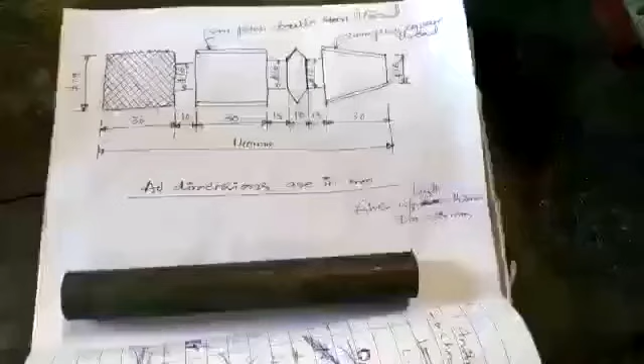Good afternoon everyone. In this lecture, I will show how to prepare a model on lathe using different operations from the given cylindrical workpiece. So this is the given diagram.

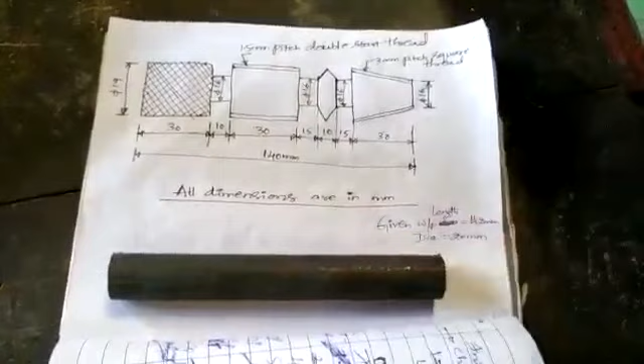This is the given workpiece. First you need to check the length of the workpiece and diameter of the workpiece. So here the length of the workpiece is 142 mm and the diameter of the workpiece is 20 mm.

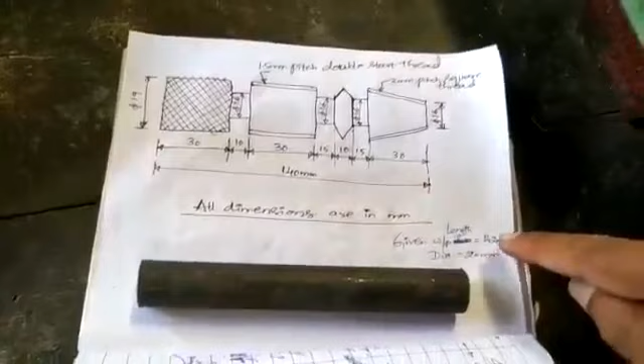So in this diagram you can observe the required diameter is 19 mm and the required overall length of the workpiece should be 140 mm. So you need to remove 2 mm in length and 1 mm in diameter.

So for that you have to do facing operation in order to reduce the length of the workpiece and cylindrical turning in order to reduce the diameter of the workpiece.

So tools required to complete this model. This is a single point cutting tool. This tool is used to do facing operation, cylindrical turning, diamond shape operation and taper turning. We can do all these operations with this single point cutting tool.

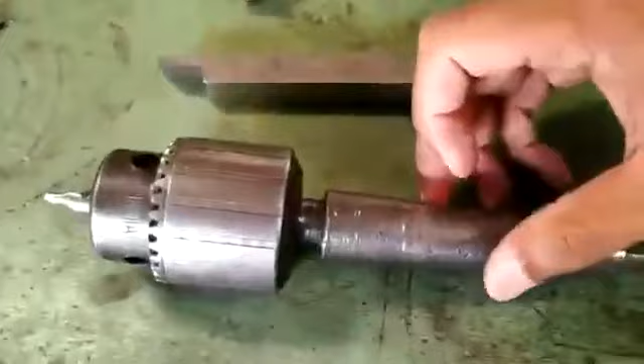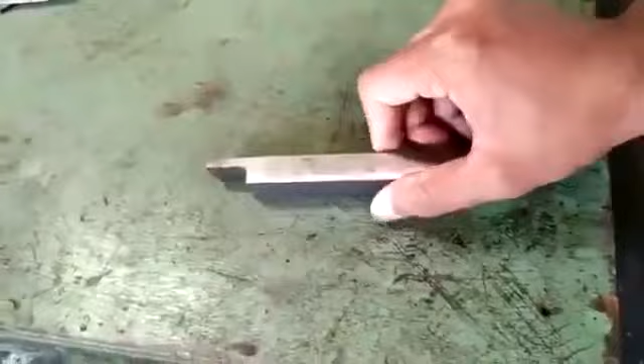So this is a center bit in order to produce a countersink hole. This is a parting tool for doing step turning operation. This is a diamond point knurling tool, a multi-point cutting tool.

So this is a single point thread cutting tool. The tool angle will be 60 degrees. So this is a square thread cutting tool. It is also a single point cutting tool.

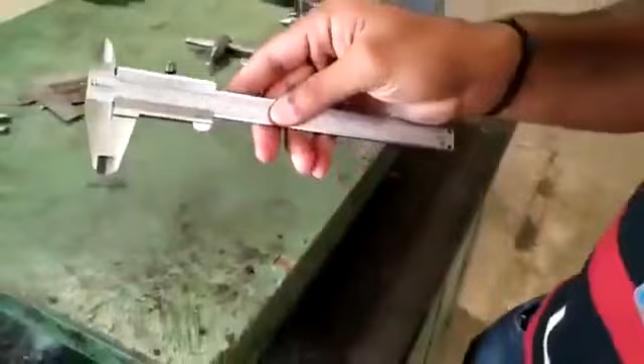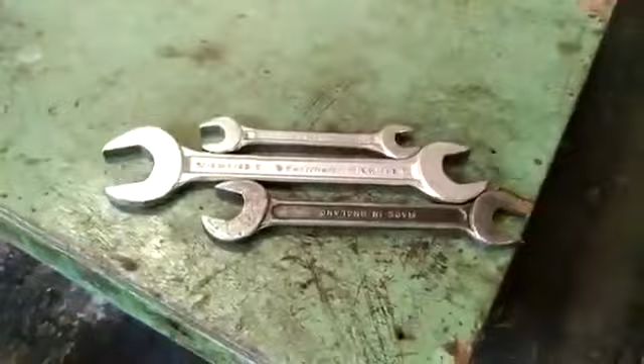In center, this is chuck key and this is tool post key, and this is vernier caliper in order to measure the length of the workpiece and diameter of the workpiece. So this is packing plates and these are all the spanners. So these are the tools required to complete the model.

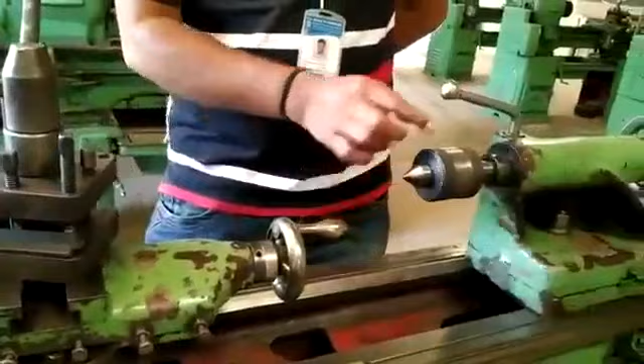First we have to fix the given workpiece in a 3-jaw chuck. Then we have to fix the revolving center in a tailstock. After fixing the revolving center, we need to place the single point cutting tool in a tool post by using a supporting plate, and this cutting tool tip should be exactly on the tailstock axis.

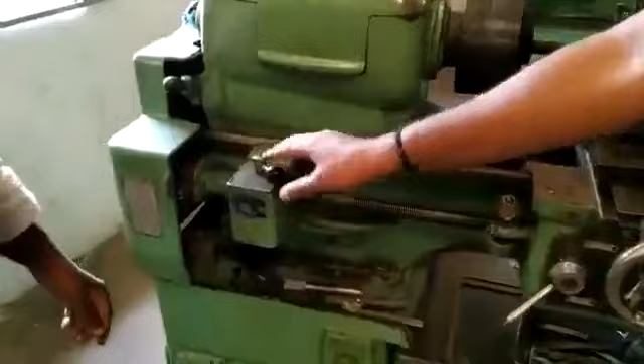So first you have to switch on the machine by pushing this knob into counterclockwise direction and make sure that the spindle rotates in a counterclockwise direction. Now we are doing the facing operation in order to reduce the length of the workpiece. Start.

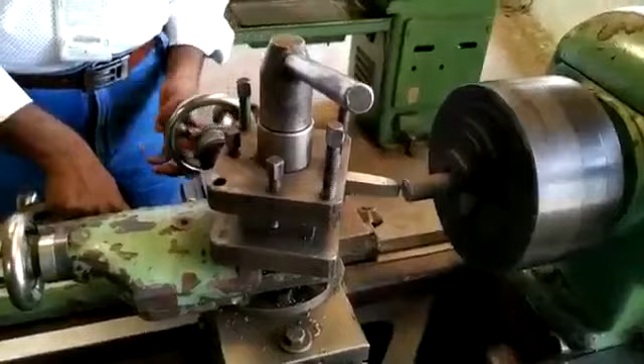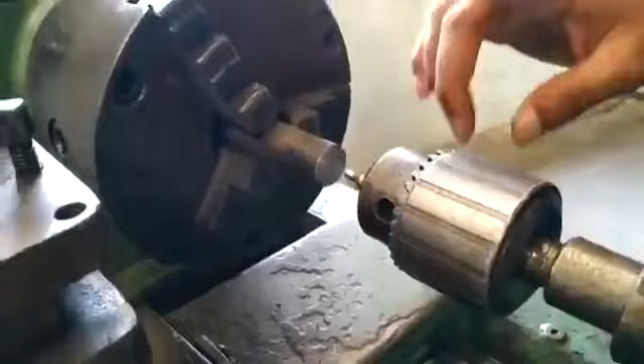So now we are doing the facing operation in order to reduce the length of the workpiece. Now we have completed the facing operation. This facing operation has to be made on both sides because if there are any burrs in the workpiece, they will be removed.

So after completing the facing operation the workpiece will reduce in length to 140 mm. So we are doing the countersink hole by fixing the countersink bit.

So after facing operation is completed, the next operation we are doing is cylindrical turning. Cylindrical turning has to be done here in order to reduce the workpiece diameter to 19 mm, because the given workpiece diameter is 20 mm.

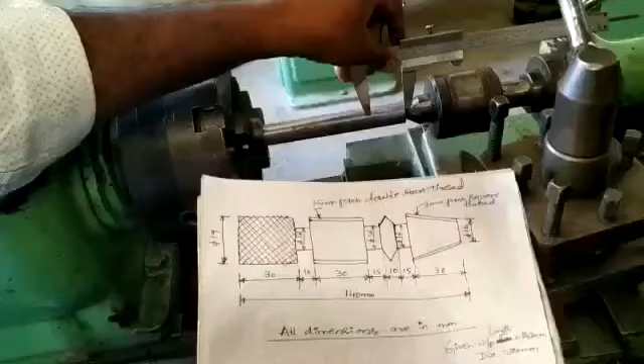So now we have completed the cylindrical turning and reduced the diameter from 20 mm to 19 mm. After the cylindrical turning is completed, the next step is to mark on the given workpiece.

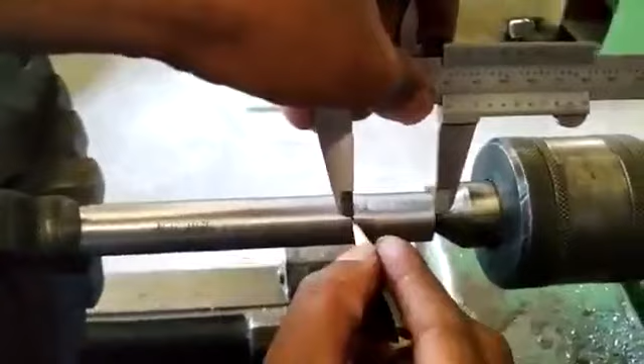So we have to mark either from the left end or from the right end. So now we have just marked 30 mm from the right hand side, right end. So next from that we are marking 15 mm.

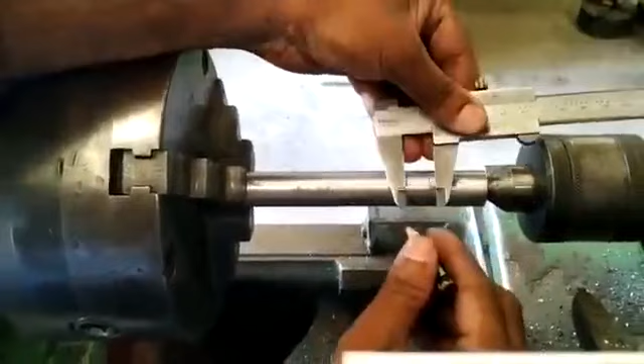Now the marking is completed. We have started from the right hand. We have marked 30 mm, next 15 mm, 10, next 15 mm, 30 mm, 10 mm and 30 mm. So now we are doing step turning for a length of 15 mm.

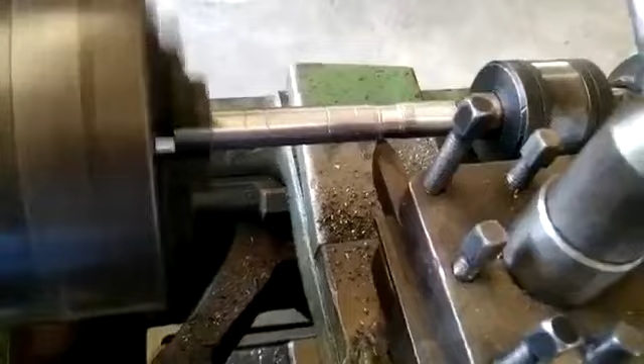And we have to reduce the diameter from 19 mm to 16 mm. So now we have fixed the parting tool, in order to make the 90 degree.

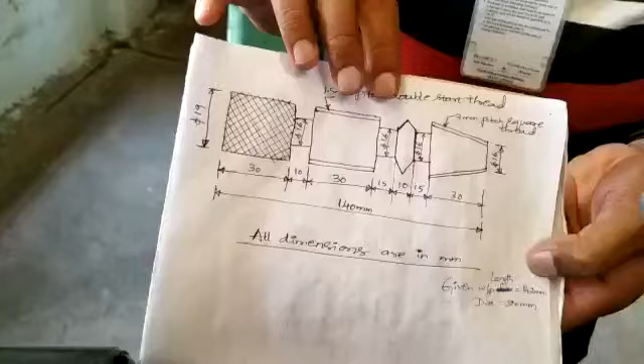Now we have completed with the step turning. So after step turning is completed, next we are doing the V shape for a length of 10 mm.

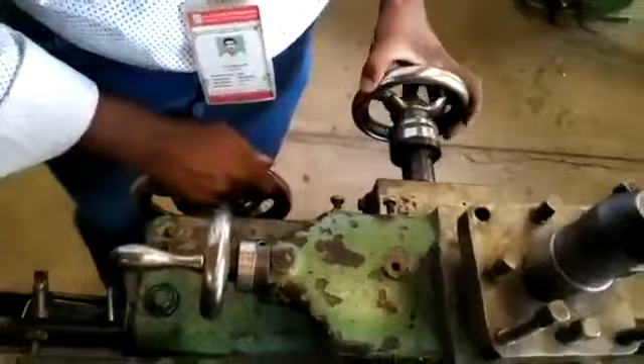We are making the V joint with the help of single point cutting tool. So now we have completed with the V shape.

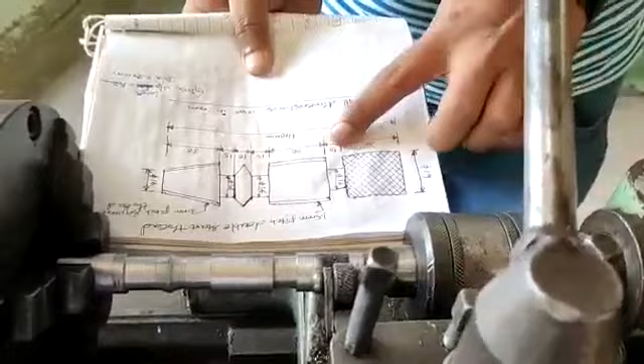Now I am doing a knurling operation for a length of 30 mm by fixing the diamond point cutting tool, knurling tool in a tool post and fixing the cylindrical workpiece in a chuck. So now you can see the knurling operation is completed for a length of 30 mm.

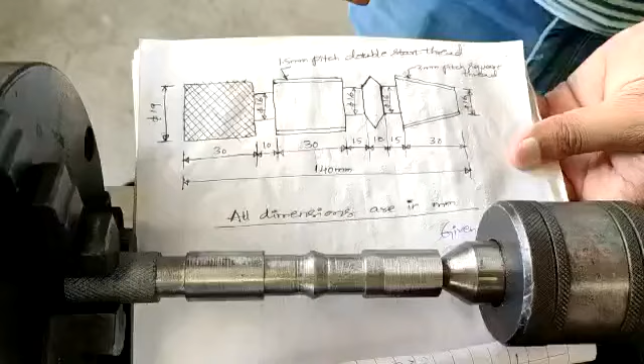So next operation I am doing is thread cutting for a length of 30 mm. So here in this diagram he has given 1.5 mm pitch double start thread. So for that we need to calculate the gear ratio.

So now I have to do thread cutting operation for a length of 30 mm. So in the diagram he has given 1.5 mm pitch double start thread. So he has given pitch in terms of millimeter, so we have to select the metric thread. If he has given the pitch in terms of threads per inch, then we have to select British Standard Whitworth, BSW thread system.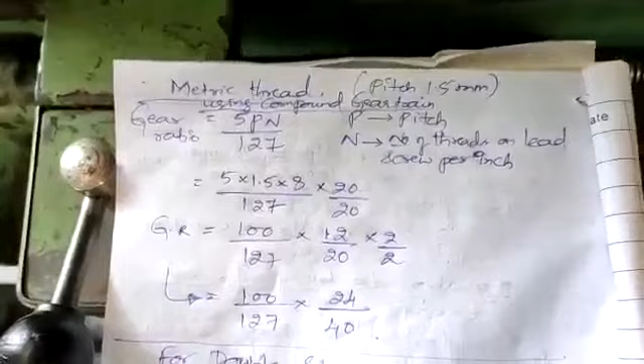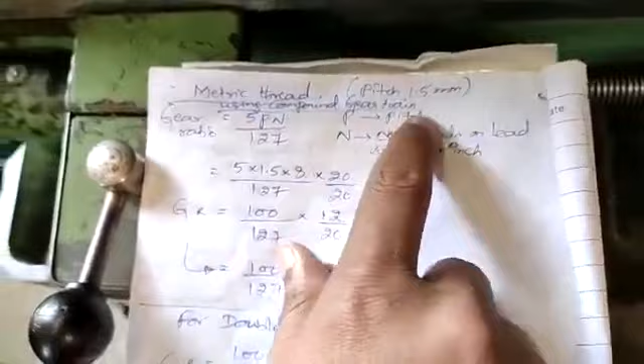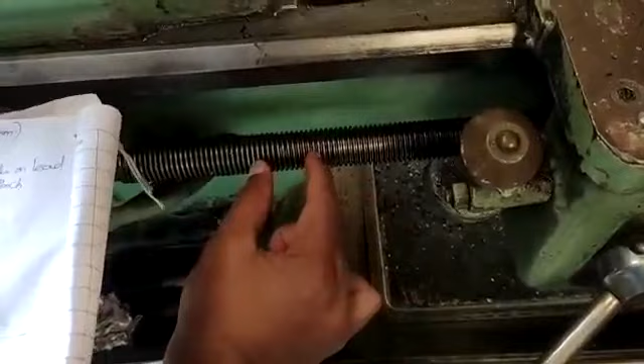For metric thread using compound gear train, in order to find out the gear ratio, we have a standard formula: 5PN divided by 127. So in this P is pitch they have given in the diagram, and N stands for number of threads on the lead screw per inch. So we need to measure the number of threads per inch. Here in this lead screw we have 8 number of threads per inch.

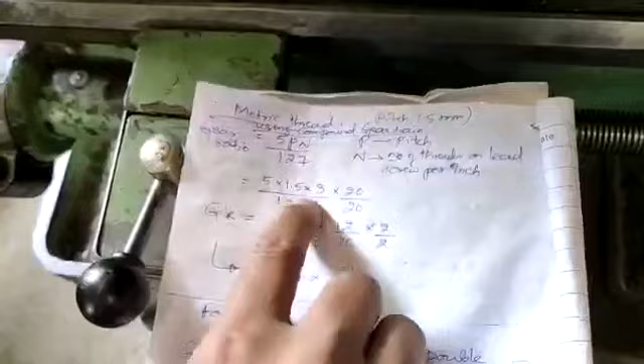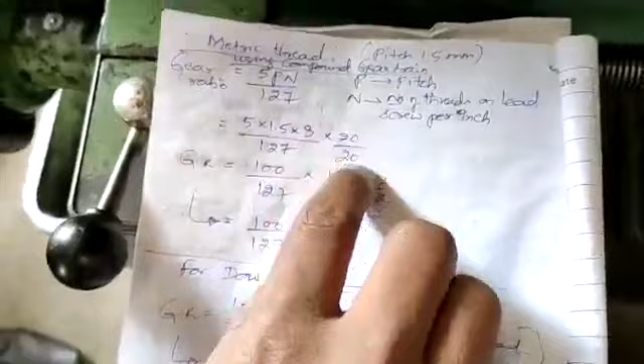So now we are substituting 5 into P, pitch he has given 1.5, into number of threads on lead screw per inch, it is 8, divided by 127. So to get 100 by 127, we need to multiply and divide by 20. So 5 into 20 is 100, divided by 127, into 1.5 into 8 is 12, divided by 20. And so we have...

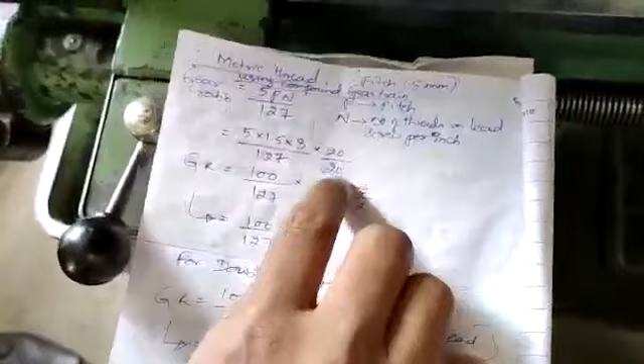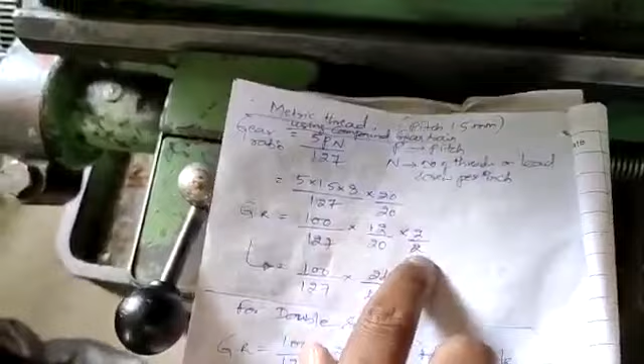So 12 by 20 - these smaller gears are not available in the shop, so we multiply and divide by 2. So now we obtained 100 by 127 into 12, to the 24 divided by 40.

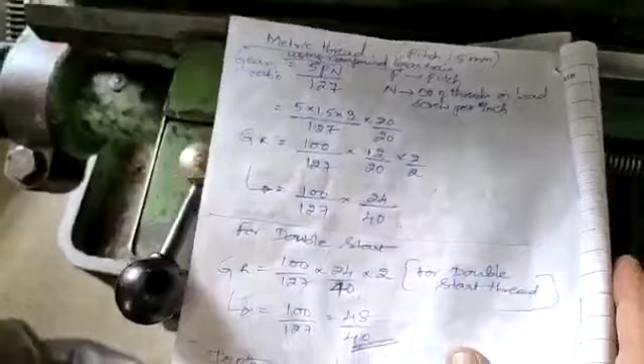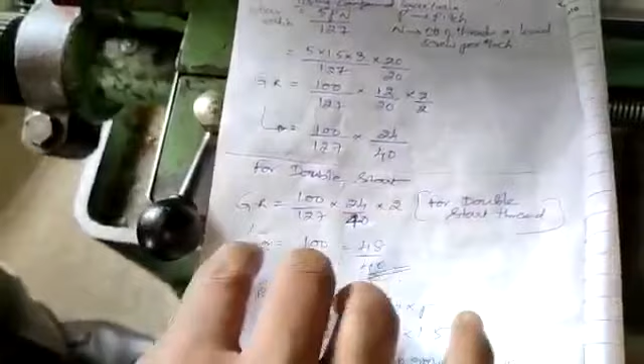So this gear ratio is for single start. In this diagram he has mentioned double start, so for that again we need to multiply it by 2 for this gear ratio. If it is triple start, we need to multiply it by 3. So now we can multiply 100 by 127 into 24 into 2, which is 48, divided by 40. So this is the gear ratio.

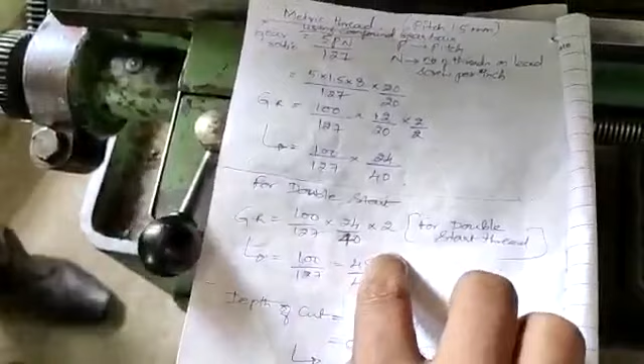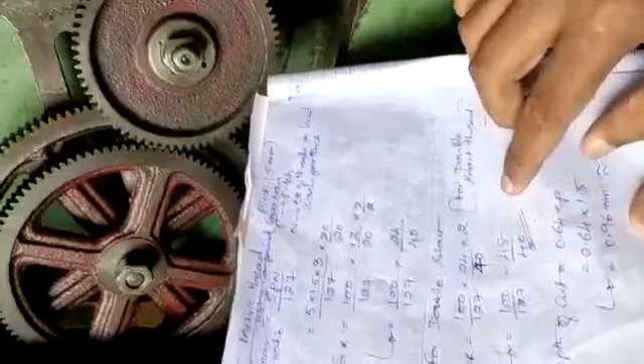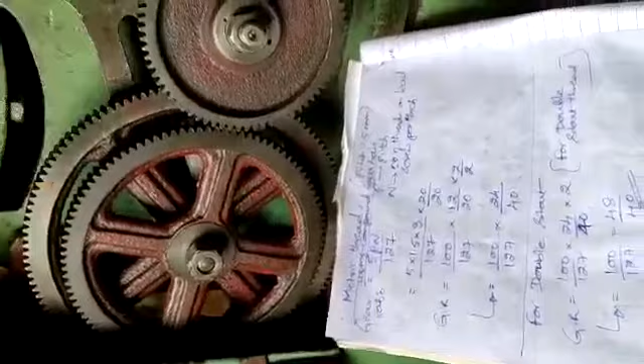So 48 is the number of teeth on the driver gear, and this is 40 number of teeth on the driven gear. So according to the gear ratio we have obtained, this is number of teeth on driver gear, and this is number of teeth on driven gear. So for this compound gear train, this is 100 number of teeth, this is 100 and this is 127. So now we have to fix here, this is the driven gear, of 40 teeth, and this is 48 teeth.

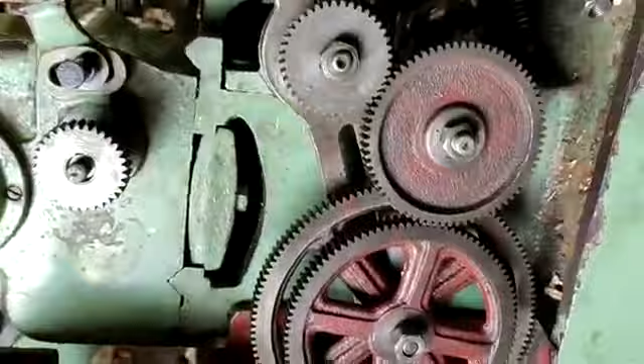So now we are changing this gear. So now we have changed the gears according to our calculation. So this is the driver gear, we have obtained in the calculation 48 teeth. So this is compound gear, 100 teeth, 127 teeth, and it is driven gear, it is of 40 teeth.

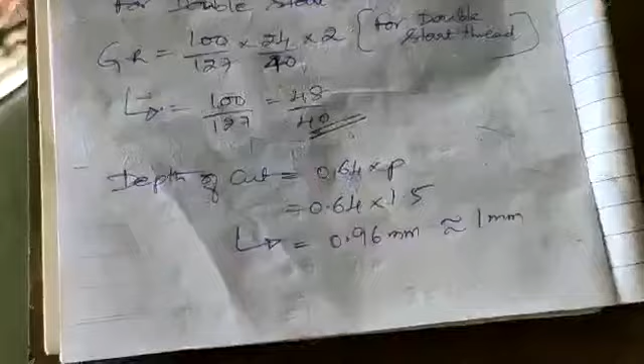We have a standard formula to find out the depth of cut: it is 0.64 times the pitch. The pitch he has given is 1.5 mm. So 0.64 into 1.5 is 0.96 mm, which is approximately 1 mm. So 1 mm is the depth of cut.

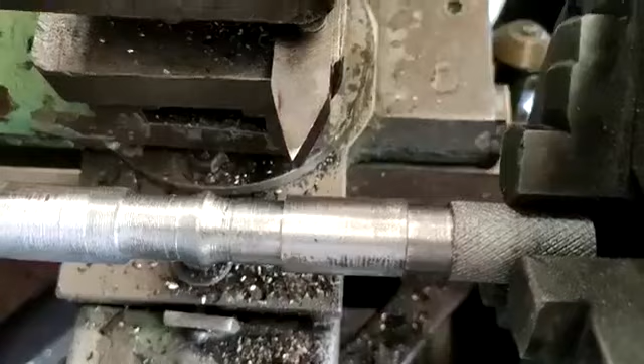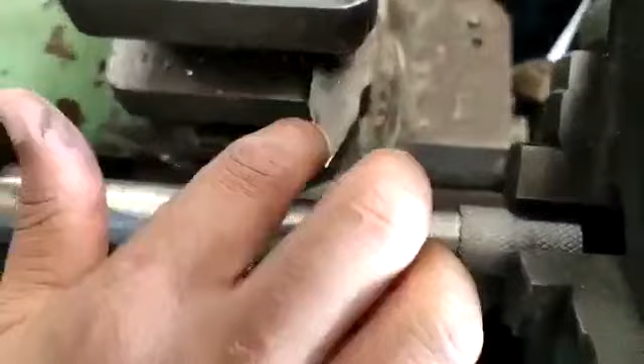So now I am doing threading operation for a length of 30 mm. For that we have to fix the thread cutting tool. The cutting tool angle should be 60 degree. So we have to fix the threading tool in a tool post, and we have to fix the workpiece.

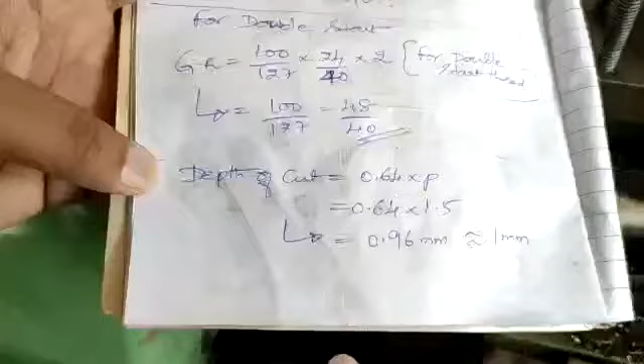According to our calculation, we have got the depth of cut of 1 mm, giving 0.1 mm for every pass. Now I have completed the single start thread by giving a total depth of cut of 1 mm.

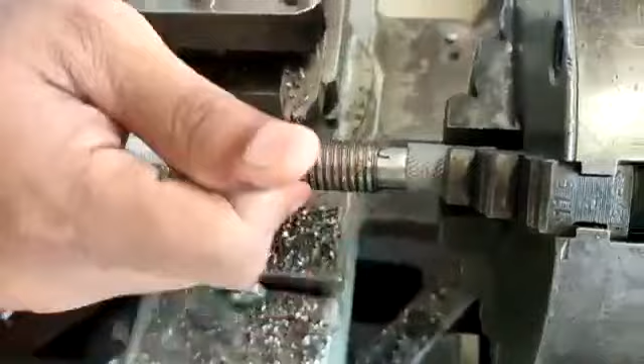To start double start thread, we need to make a few changes in the gear train. One of the teeth in the 48 teeth gear meshes with the compound gear of 127 teeth, so we have to mark here. This gear has 48 teeth, so we need to mark exactly half, that is 24 teeth. Counting from here 1, 2, 3, 4 and so on, this is the 24th tooth, so we need to mark here.

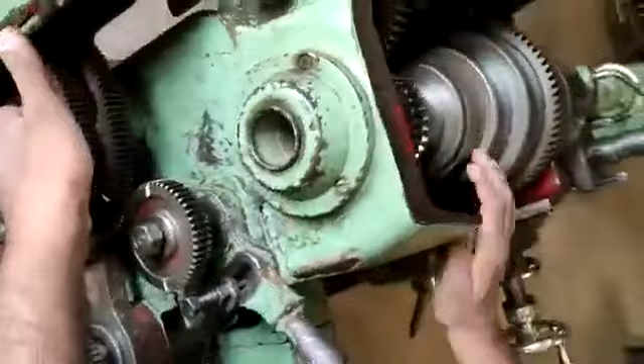By rotating the spindle, we have shifted the previous mark to here. One single start thread is over. Now I am doing the double start thread, giving a depth of cut of 1 mm, with 0.1 mm depth of cut for every pass, so we have to pass 10 times to complete. Now the double start thread is completed.

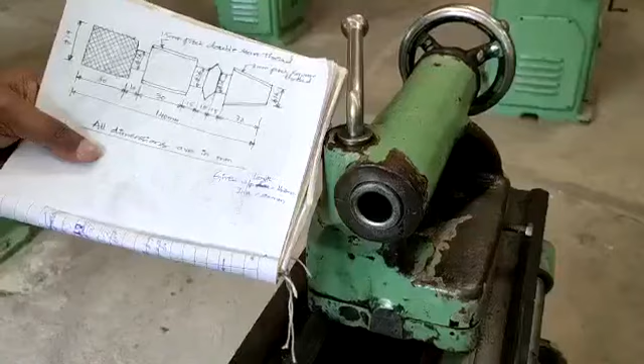Now I am doing taper turning operation for a length of 30 mm. For taper turning we have two methods: one is swiveling the compound rest method, and the second is offsetting the tailstock method. Here we are doing the second method, offsetting the tailstock method.

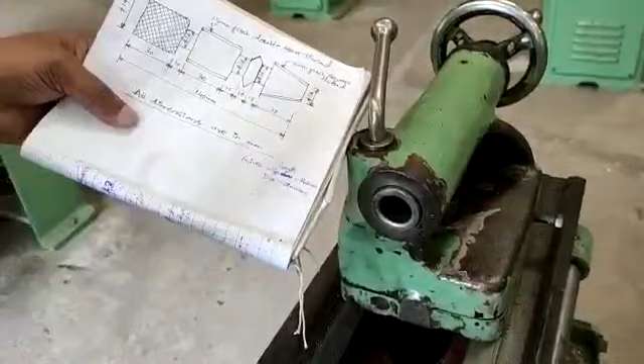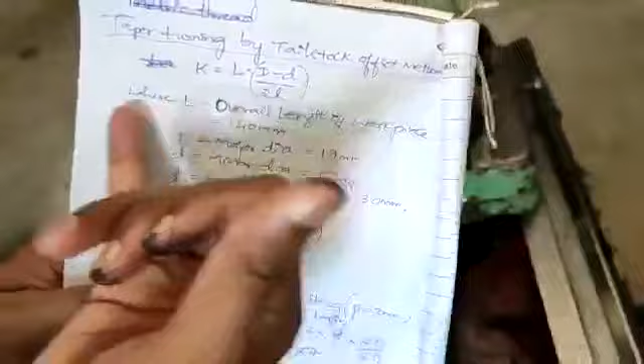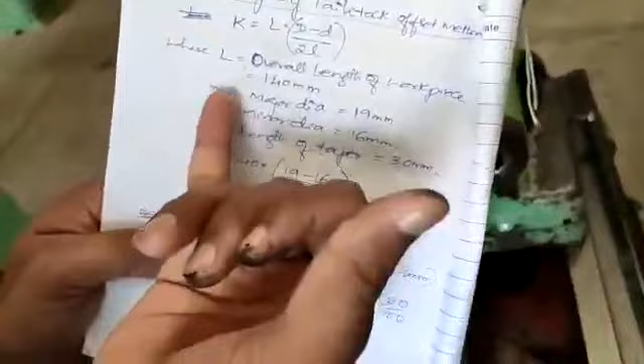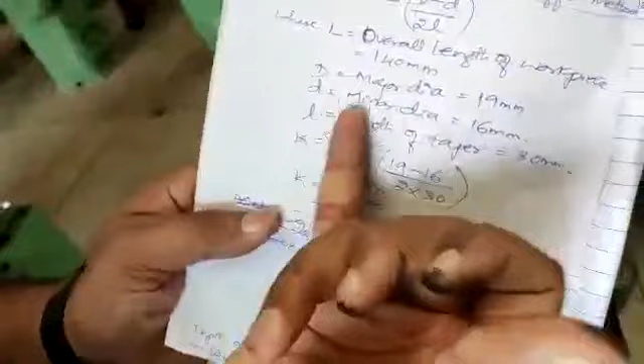So here we are doing the tailstock offset method. We have a standard formula: K equals L into (D minus d) divided by 2l. Where L is the overall length of the workpiece, which is 140 mm, D is the major diameter, which is 19 mm, and small d is the minor diameter, which is 16 mm. Small l is the length of the taper, which is 30 mm. By substituting all these values, we get the value of K equal to 7 mm.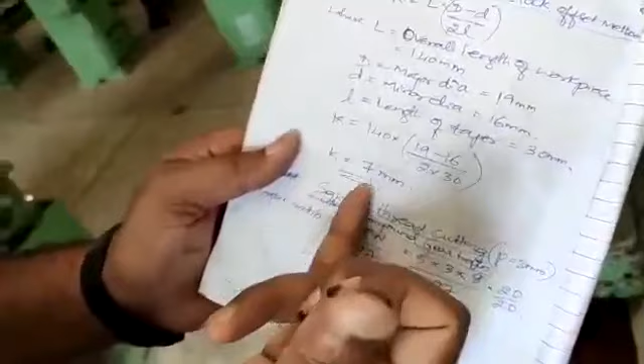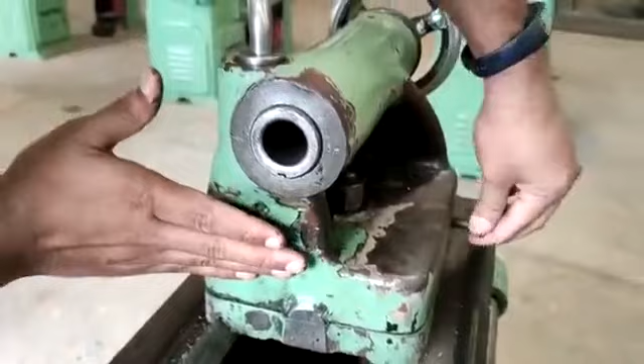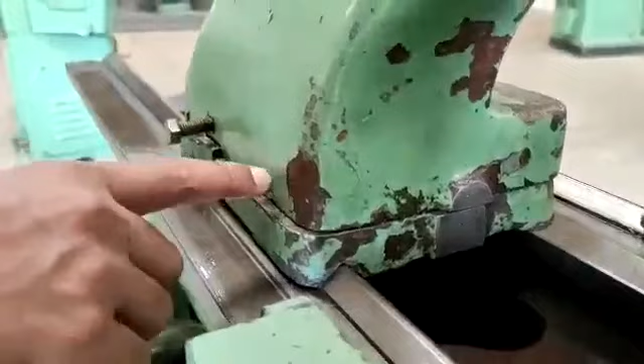Here you can observe the bottom portion of the tailstock exactly coincides with the top portion. According to calculation we have got K equal to 7 mm, so now we have to shift the top portion of the tailstock by loosening this screw, and slide it so that the zero coinciding mark aligns with the 7th division. Now you can observe we have shifted the top portion of the tailstock.

Now we are doing the taper turning operation by the tailstock offset method. You can observe one end of the diameter is getting reduced. This is the major diameter of the tapered portion, which is 19 mm, and this is the minor diameter, which is 16 mm.

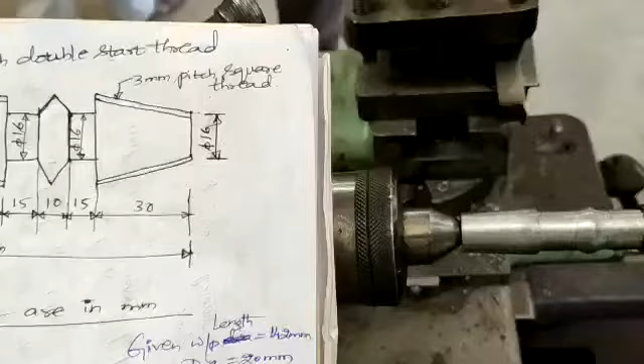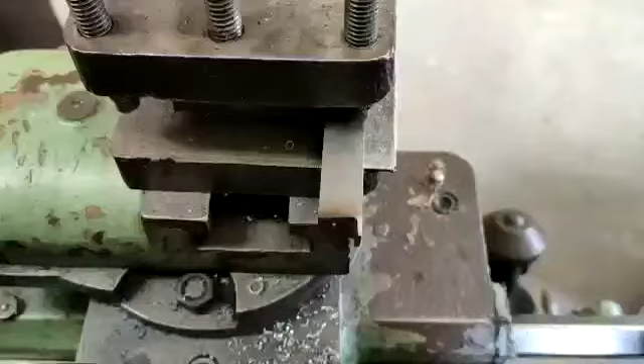Now I have completed the taper turning operation, and according to the sketch we have to do a 3 mm pitch square thread on this tapered portion. For this we have to fix the square thread cutting tool on the tool post. For square threading operation on a tapered portion, you have to start from the minor diameter.

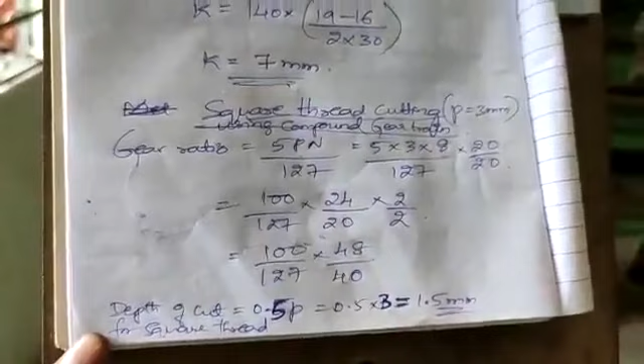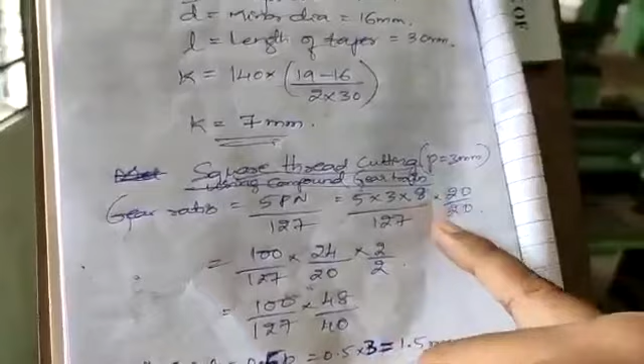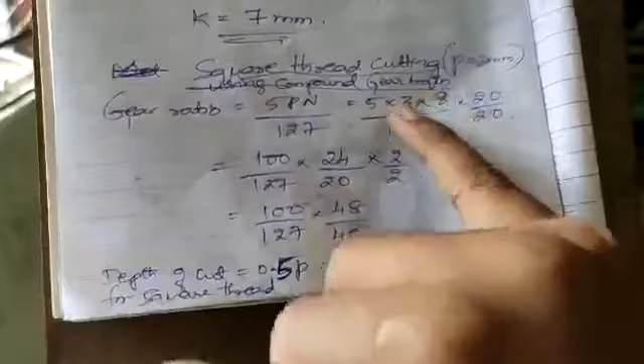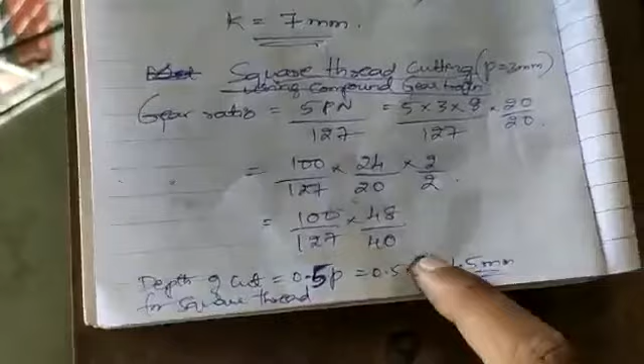For square thread cutting using the compound gear train, we have a standard formula to find the gear ratio, which is 5pn by 127. Here in this sketch, pitch is given as 3 mm, and n is the number of threads per inch on the lead screw, which is 8. So to get 100 by 127 we need to multiply and divide by 20: 5 into 20 is 100, divided by 127; 8 threes are 24, divided by 20. Since we are not available with this gear size, we need to multiply and divide it by 2, so that it becomes 100 by 127 into 24 into 2, 48 divided by 40. This is the gear ratio. Depth of cut for square thread is 0.5 times the pitch. Here pitch is given as 3 mm, so 0.5 into 3 is 1.5 mm.

So this is the given workpiece. Now we have completed the model according to the given sketch. Thank you.